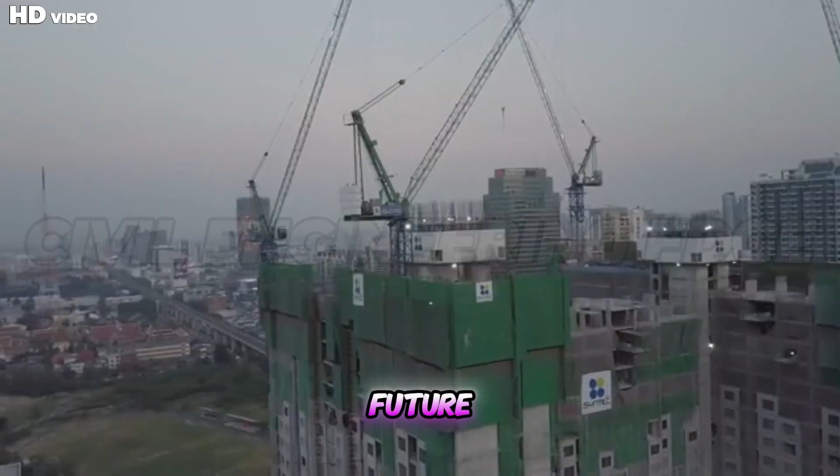Imagine a future where skyscrapers design themselves, where robots lay foundations, and where construction sites operate like intelligent ecosystems, learning, adapting, and building with flawless precision. That future isn't science fiction, it's happening right now.

Artificial intelligence is revolutionizing the world of civil engineering, transforming how we design, plan, and build. From autonomous machines to predictive modeling, AI is creating a smarter, safer, and more sustainable built environment.

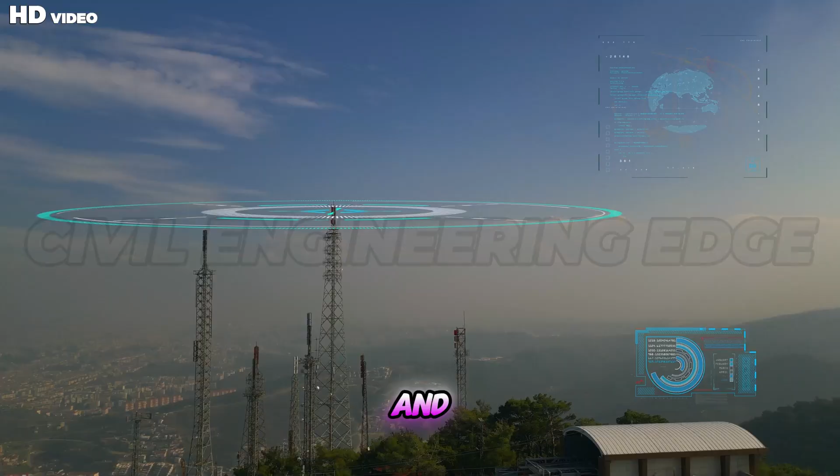What if I told you the buildings of tomorrow aren't designed by architects alone, but by algorithms that think, learn, and evolve? Imagine a world where skyscrapers optimize their own shape for wind resistance, where bridges can sense their own stress levels and request maintenance before a single crack appears. This isn't a scene from science fiction, it's happening right now.

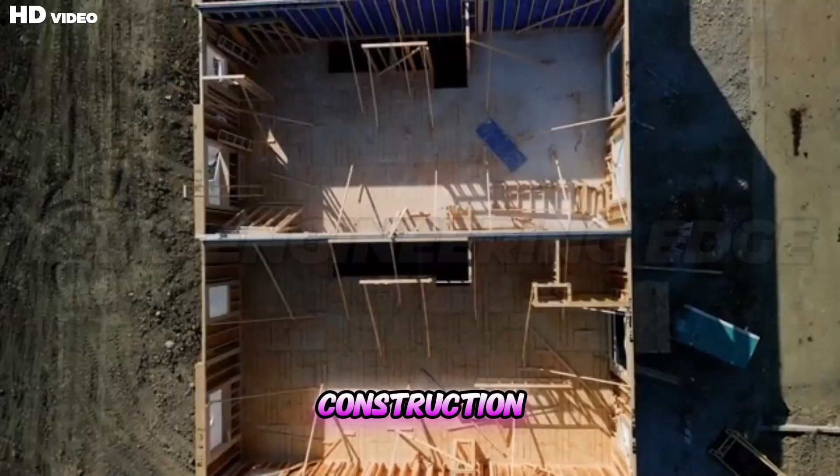Across the world, artificial intelligence has quietly entered construction sites, design studios, and project offices, transforming the way we imagine, plan, and build. From Tokyo's automated prefabrication plants to Dubai's 3D printed buildings, AI is not just assisting engineers, it's redefining engineering itself. The concept of construction has always relied on precision, coordination, and human expertise.

But today, the complexity of modern infrastructure, smart cities, mega projects, and climate-resilient structures has exceeded what human teams can analyze alone. AI steps in as an intelligent collaborator capable of scanning millions of data points, identifying the most efficient material usage, and predicting construction outcomes with astonishing accuracy.

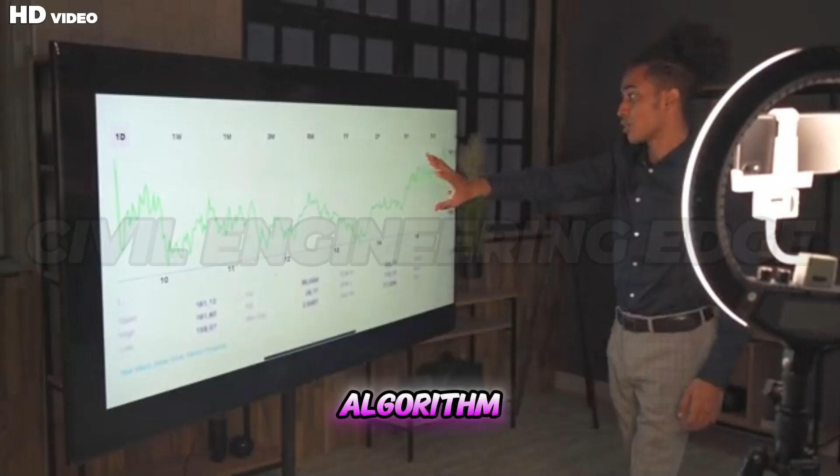Picture this. On a next-generation job site, robotic arms assemble steel components guided by AI vision systems. Drones continuously map progress, and a central algorithm monitors cost, safety, and schedule in real time. Every deviation, every inefficiency, every unsafe movement is flagged instantly. The site runs like a symphony, not by command, but by collaboration between human ingenuity and digital intelligence.

This quiet yet powerful transformation marks the silent revolution in civil engineering. Unlike revolutions of the past that shouted through machines and smoke, this one hums through sensors, models, and code. It's the evolution of creation itself, where technology doesn't just serve construction, it becomes part of it.

As we begin this exploration, remember, the skyline you'll see in the next decade isn't just human achievement. It is the outcome of minds, both biological and artificial, working together to build tomorrow's world.

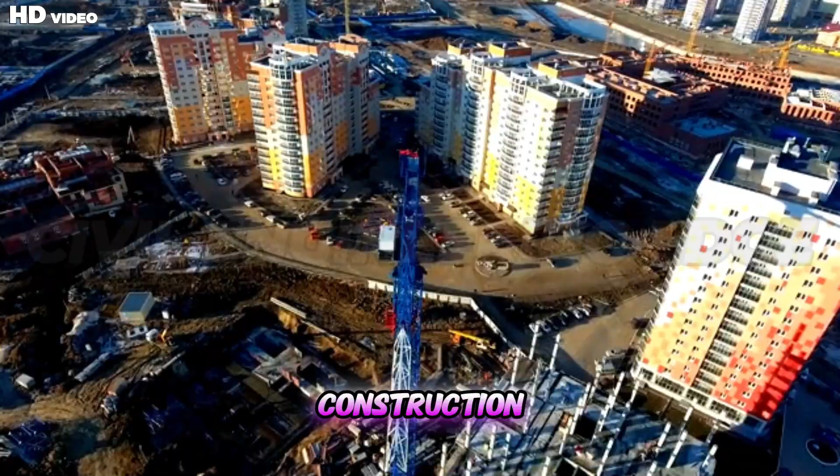To appreciate how AI is reshaping construction, we must first understand the challenges that have haunted the industry for generations. The modern construction sector is one of the world's largest, contributing nearly 13% of global GDP. Yet, it is also one of the least digitized. Projects routinely suffer from cost overruns, schedule delays, and rework. Studies reveal that on average, large projects take 20% longer to complete and cost 80% more than planned.

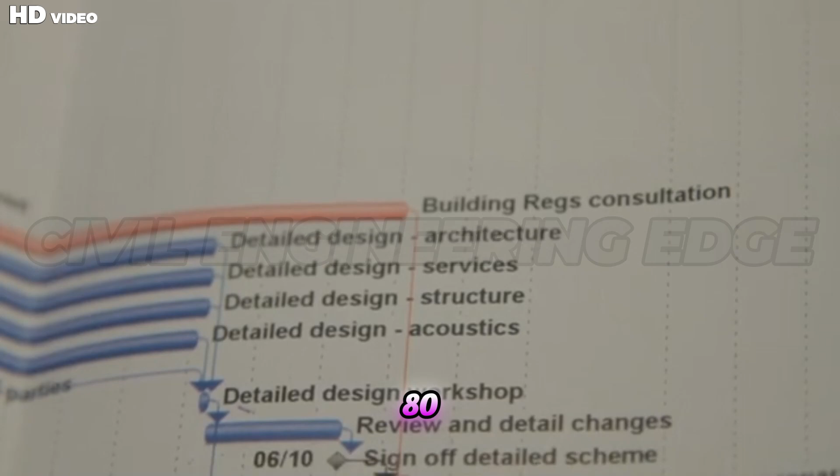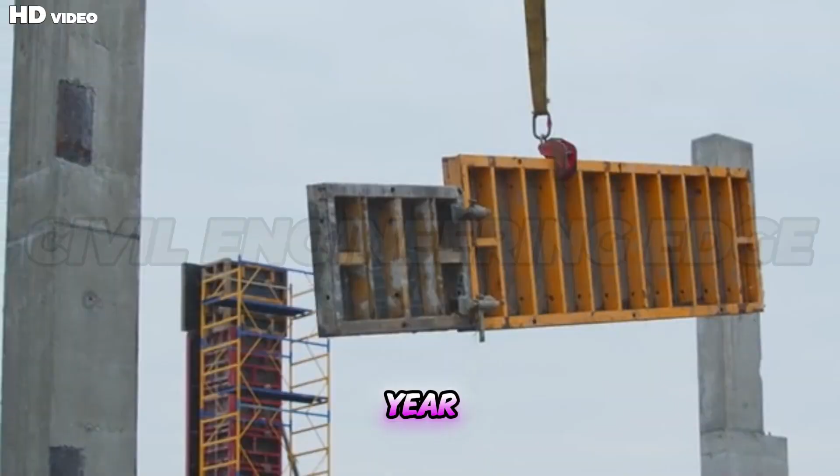Why? Because construction involves countless variables: weather changes, design alterations, material availability, and human coordination across hundreds of workers and suppliers. Even small errors early in planning can cascade into massive losses later. One miscalculated beam, one late delivery, or a misread design update can stall an entire project. These inefficiencies drain billions from global economies every year, and then there's the human cost.

Construction remains one of the most hazardous industries, responsible for nearly 1 in 5 workplace fatalities worldwide. Despite technological tools and safety regulations, real-time awareness and predictive risk control have been limited until now. Adding to that are labor shortages and the demand for faster urbanization. Cities are growing, infrastructure is aging, and sustainability standards are rising. Yet, the traditional methods of project execution cannot keep pace with these pressures.

At the same time, data fragmentation plagues the industry. Information is scattered across drawings, spreadsheets, emails, and software platforms. Most of this valuable data remains untapped. It's here that artificial intelligence finds its greatest purpose. AI can synthesize massive datasets, learn from previous projects, and identify inefficiencies invisible to the human eye. It can transform guesswork into precision, risk into predictability, and delay into optimization.

In short, the construction world is ripe for disruption. And AI is stepping in not as a futuristic luxury, but as a necessity, the key to solving the age-old problems of time, cost, and safety that have limited progress for decades.

Thesis statement: AI, transforming construction forever.

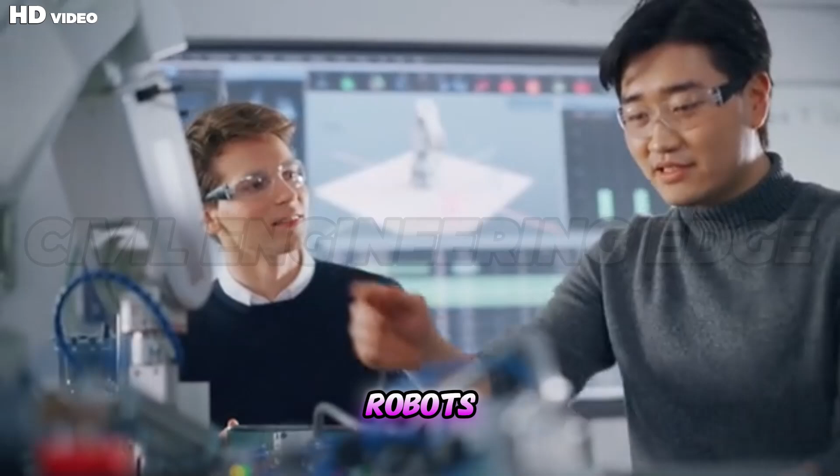Visual montage: engineers using AR glasses, robots tying rebar, dashboards glowing with live analytics, 3D printed walls rising layer by layer. The score turns uplifting, symbolizing innovation and renewal.

Artificial intelligence is not a minor upgrade to construction, it's a paradigm shift. Unlike past innovations that focused on stronger materials or faster machinery, AI changes the intelligence behind every decision. It's teaching the industry to think smarter, predict better, and build cleaner.

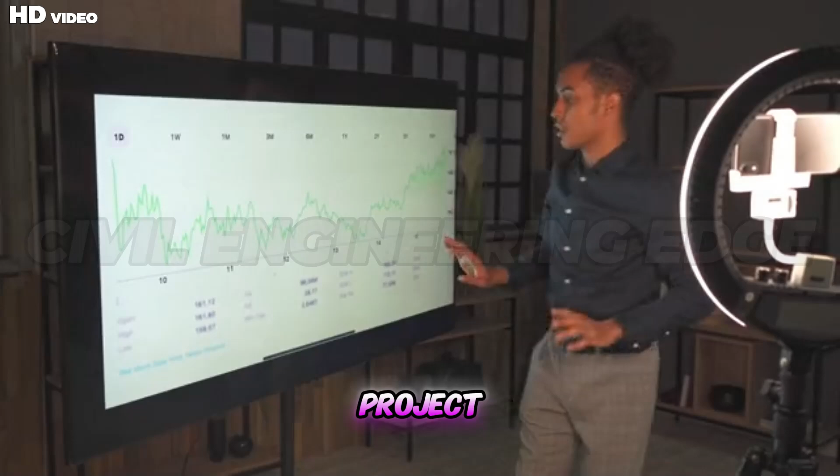In project management, AI now analyzes historical data and real-time conditions to forecast which activities risk falling behind schedule. Machine learning models detect subtle trends, weather disruptions, workforce performance, or material shortages, long before they cause trouble. Managers receive alerts, enabling proactive decisions that save both time and money.

In safety management, AI-powered cameras and sensors continuously scan the site, identifying unsafe postures, missing helmets, or hazardous proximity to machinery. These systems have already reduced accident rates on experimental smart sites by over 30%. In material logistics, algorithms track deliveries, calculate demand fluctuations, and prevent waste by suggesting optimal ordering sequences. The environmental footprint shrinks, while sustainability goals strengthen.

And when it comes to design, AI isn't just following rules, it's creating new ones. Through generative algorithms, engineers can input goals like maximize sunlight exposure or reduce steel weight, and the system produces countless optimized versions of a structure, each balancing performance and economy.

This synergy marks the fourth industrial revolution in construction, where human creativity fuses with digital intelligence. The result is a smarter, safer, and more sustainable industry capable of meeting global infrastructure needs with precision never before imagined. AI doesn't replace civil engineers, it amplifies them. It frees professionals from repetitive calculations, allowing them to focus on creativity, ethics, and innovation.

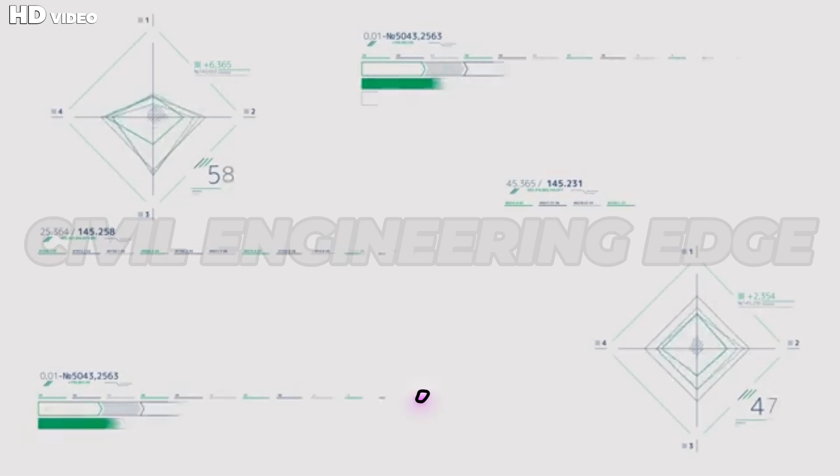The engineer of tomorrow will not only build with concrete and steel, but also with data and algorithms. The revolution is underway, reshaping the very foundations of how humanity constructs its future, and this is only the beginning. In the next chapter, we dive deeper into how AI transforms the most crucial stage of all, design and planning, taking us far beyond traditional blueprints into the realm of intelligent creation.

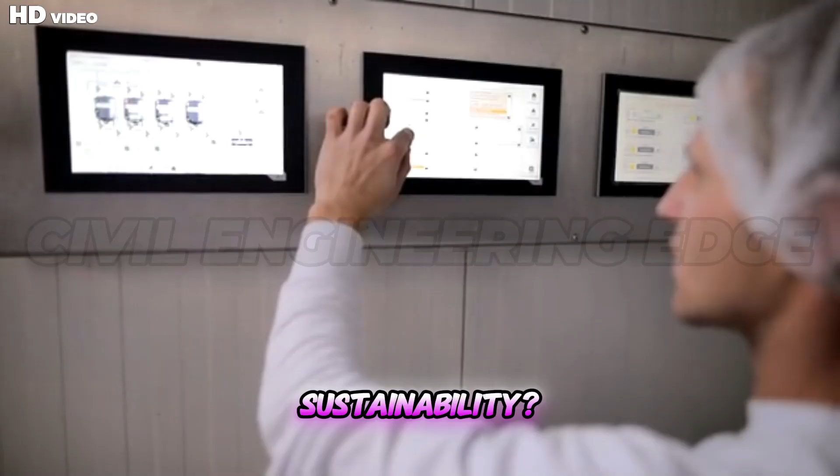In traditional design, engineers sketch, simulate, and iterate, a process often limited by time and imagination. But what if a computer could explore every possible solution, guided by physics, efficiency, and sustainability? That's the magic of generative design, one of AI's most astonishing tools in modern construction.

Generative design begins when engineers define a set of parameters: site dimensions, loads, materials, budget, or sustainability goals. Instead of producing one layout, the AI engine generates thousands of alternatives, each tested against structural performance, safety, and cost effectiveness. The system doesn't guess. It learns, refines, and evolves, discovering design solutions beyond human intuition.

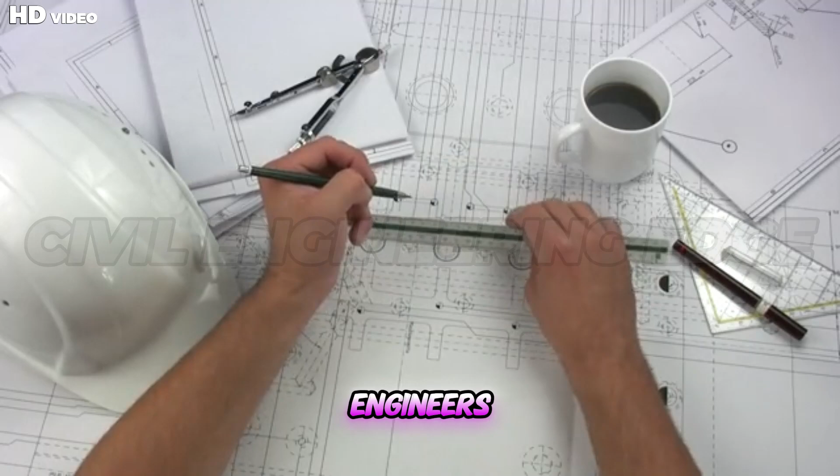Imagine designing a high-rise tower in a wind-prone city. Traditionally, engineers might analyze 5 or 6 structural frames. With AI-driven generative design, the software explores thousands, each accounting for wind velocity, seismic loads, energy flow, and even sunlight exposure. Within minutes, the algorithm identifies the geometry that balances stability, comfort, and material economy.

In practice, companies like Autodesk, Arup, and Airbus have used generative design to create incredible forms. Autodesk's Toronto office, for example, was designed through AI optimization. The program generated 10,000 potential layouts, balancing daylight, employee preference, and acoustic comfort, selecting the best configuration for human productivity.

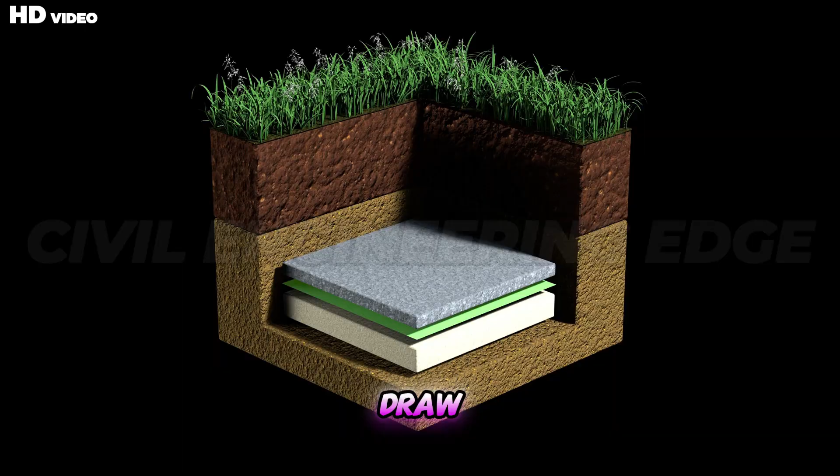Similarly, in bridge design, AI algorithms mimic natural patterns like bone or coral growth to minimize weight while maintaining strength, a principle now used in 3D printed trusses and modular bridge decks. For civil engineers, this is revolutionary. The AI doesn't just draw, it thinks structurally. It identifies where loads can redistribute, where materials can be reduced, and how form can serve function with maximum efficiency.

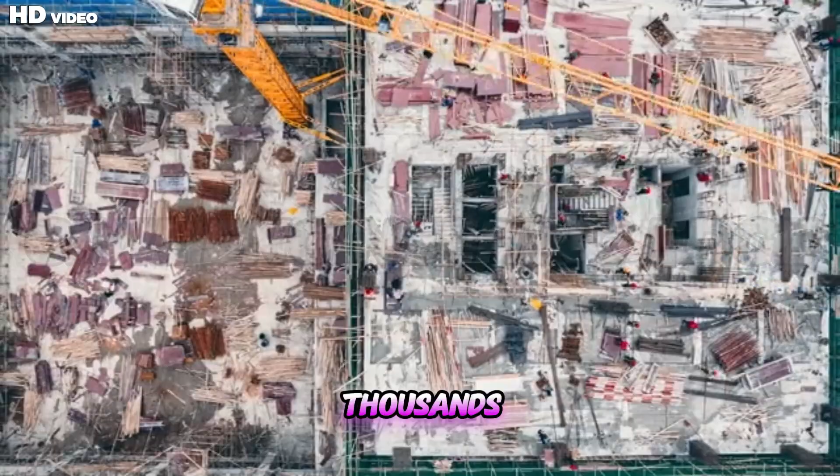Engineers can now focus on judgment and innovation while AI handles the computational complexity. Generative design represents the future where data replaces guesswork and algorithms enhance creativity. Structures become more sustainable, lighter, and resilient. AI's ability to simulate and optimize thousands of iterations not only saves time, but also minimizes waste and cost.

In essence, AI has become the co-designer of the modern world, crafting solutions that were once impossible to conceive. It's not the end of human creativity, it's the expansion of it. The blueprint is no longer static. It's alive, adaptive, and intelligent.

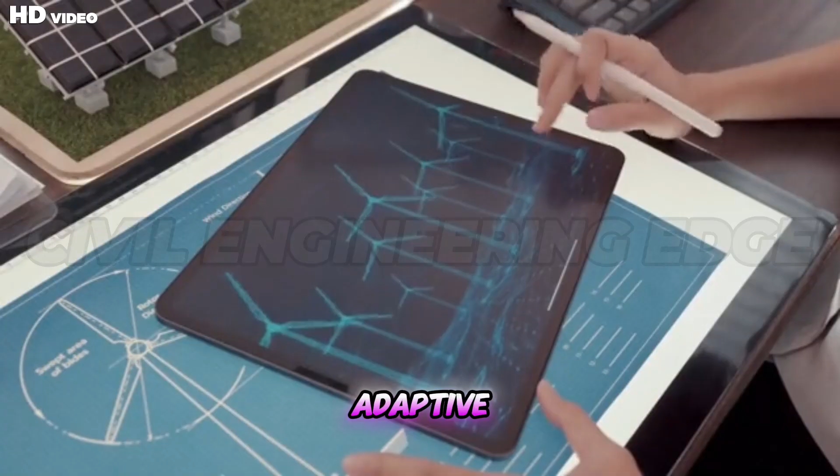Predictive modeling: forecasting time, cost, and risk. Visual: dashboards filled with project analytics, timelines, and 3D models updating in real time. AI overlays highlight potential bottlenecks before they occur.

Background: confident, analytical tone. In construction, uncertainty has always been the greatest enemy: delays, cost overruns, material shortages, or unforeseen risks. But what if engineers could see the future of their projects before even laying the foundation? That's the power of AI-driven predictive modeling.

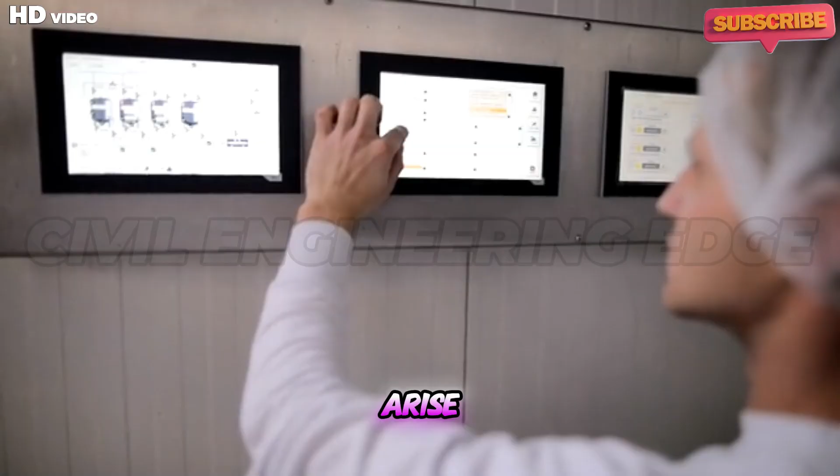Predictive modeling uses artificial intelligence and machine learning to analyze historical data, sensor inputs, and environmental conditions to forecast project outcomes with incredible accuracy. Instead of reacting to problems, project managers can now prevent them before they even arise. Every construction site generates enormous data: labor productivity, weather patterns, delivery schedules, equipment health, and material flow.

AI sifts through all of it, recognizing patterns invisible to human planners. The system then predicts where potential risks may emerge, whether it's a schedule delay due to rain, a cost spike caused by supply issues, or a safety hazard from equipment fatigue.

For example, AI-based scheduling tools like ALICE Technologies and nPlan have revolutionized how engineers plan megaprojects. These systems learn from thousands of past projects, analyzing what caused delays or cost escalations. When applied to a new project, AI forecasts likely risks, suggests the most efficient sequence of activities, and even simulates multiple construction strategies to find the one that minimizes downtime and maximizes productivity.

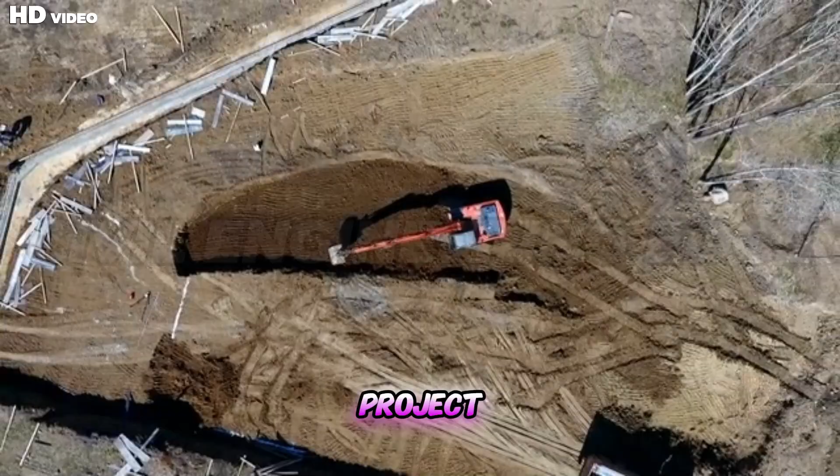Consider a metro tunnel excavation project. The AI can analyze soil composition, machinery performance, and previous tunneling records to predict where collapse risks or slowdowns might occur. Managers can then reassign resources, adjust work hours, or strengthen supports before problems appear.

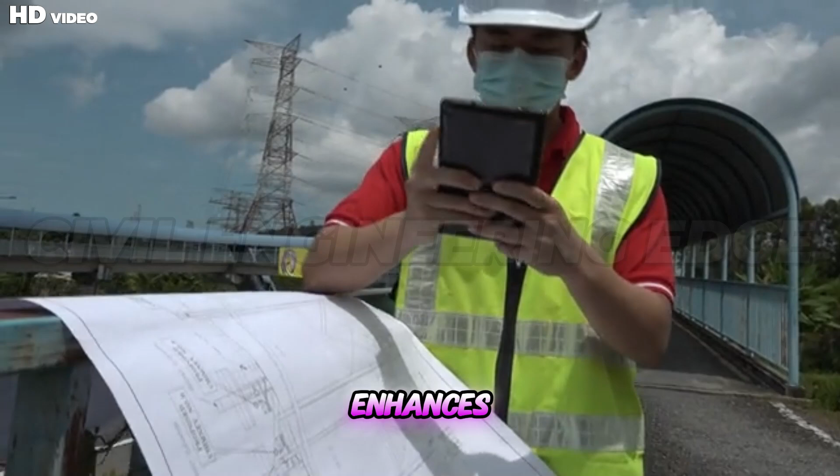The impact on budgeting is equally powerful. AI-driven cost models continuously update based on market trends, material prices, and labor rates, providing real-time financial foresight. This means project managers no longer rely solely on static estimates. They work with dynamic forecasts that evolve with the project. Predictive modeling also enhances safety. AI can evaluate site footage and worker movement to anticipate accident-prone areas, ensuring proactive safety measures.

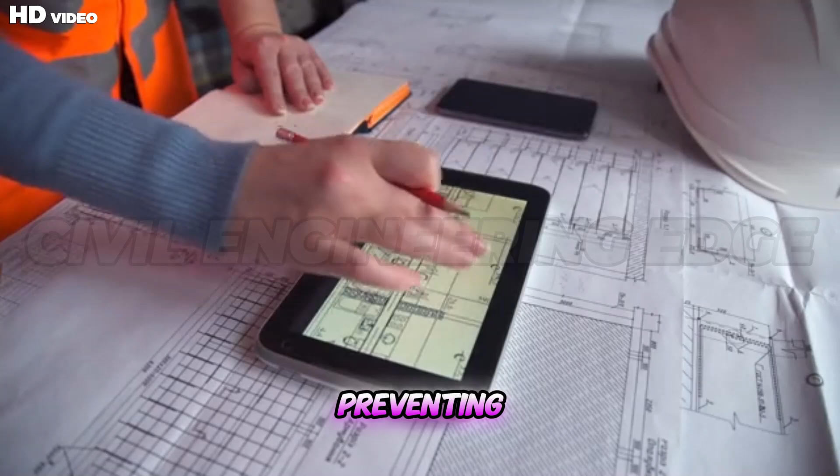Ultimately, predictive modeling transforms uncertainty into precision. It gives engineers a digital sixth sense, an analytical intuition that sees risks ahead, controls costs, and ensures timely delivery. In the age of AI, construction management is no longer about reacting. It's about predicting, planning, and preventing. The result: safer projects, leaner budgets, and timelines that finally stay true to their promise.

BIM integration, supercharging collaboration and clash detection. Visual: immersive digital environment. Architects, engineers, and contractors wearing AR headsets interact with a shared 3D model floating in midair. Lines glow as AI detects and resolves design conflicts automatically.

Few innovations have transformed construction collaboration like building information modeling, BIM. But when combined with artificial intelligence, BIM evolves from a visualization tool into an intelligent ecosystem, one that thinks, predicts, and coordinates every layer of a project in real time. Traditional BIM allows architects, engineers, and contractors to work on a shared 3D model. However, human coordination still leaves room for design clashes, a duct running through a beam, or misaligned columns between structural and mechanical drawings. With AI-powered BIM integration, these conflicts are detected automatically, even before construction begins.

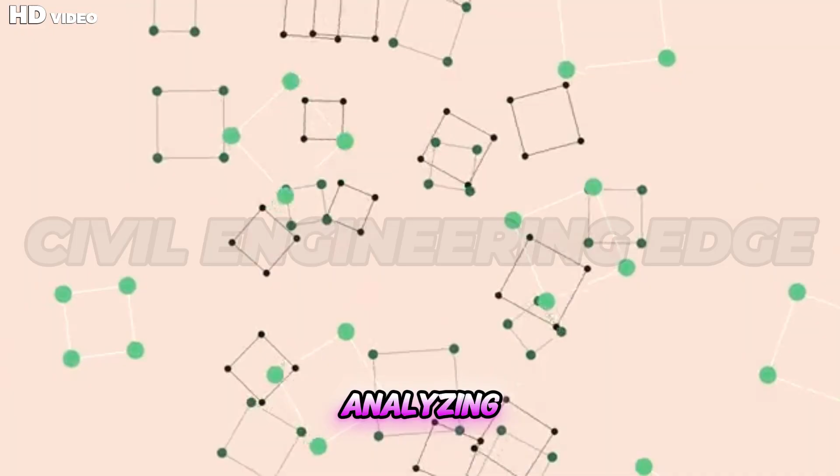Here's how it works. AI algorithms continuously scan the BIM database, analyzing geometry, materials, and connections. When the system identifies a potential clash, say an HVAC line intersecting a reinforcement zone, it alerts the design team instantly. Not only that, AI can also suggest corrections, recommending the optimal routing path or dimension adjustments based on learned patterns from thousands of previous models.

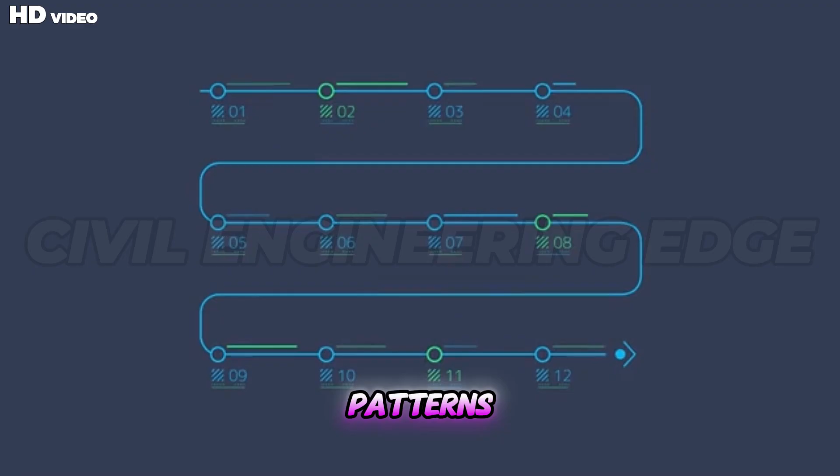The power of AI BIM integration doesn't stop there. Real-time project data from drones, sensors, or IoT devices feeds back into the BIM model, creating what's known as a digital twin. This twin mirrors the physical site, tracking progress, material status, and performance metrics. Engineers and managers can virtually walk through the live model, spotting delays or design mismatches immediately.

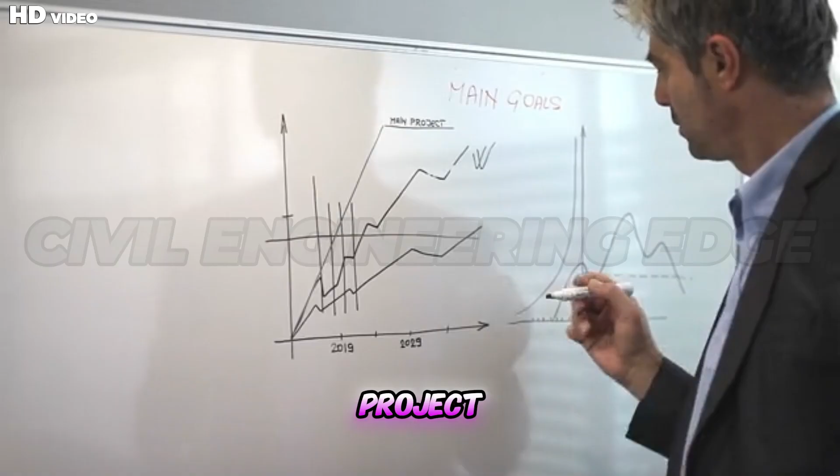Companies like Trimble, Autodesk, and Bentley Systems are pioneering AI-assisted BIM platforms where machine learning predicts scheduling conflicts, material shortages, or structural stress concentrations. The system learns from every project, meaning each new build becomes smarter than the last. AI also enhances collaboration across disciplines. Structural, electrical, and mechanical teams no longer work in isolation. Instead, AI harmonizes inputs from all fields, ensuring consistency and accuracy throughout the life cycle, from concept to maintenance.

Imagine viewing an entire smart city model where every bridge, tunnel, and high-rise updates in real time: energy use, crowd flow, temperature, and structural health visible through an AI dashboard. That's not a dream. It's the direction in which construction technology is rapidly evolving. In essence, AI transforms BIM from a static 3D model into a living, learning infrastructure system. It doesn't just help us see buildings better, it helps us build them smarter, faster, and safer than ever before.

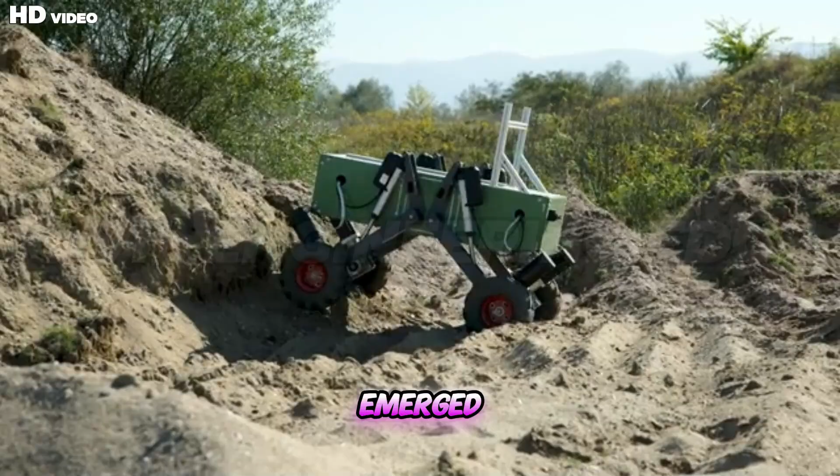Robotics and automation, the smart workforce: autonomous construction equipment. In the modern era of construction, a new generation of workers has emerged, tireless, precise, and immune to fatigue. These are the autonomous construction machines, intelligent excavators, bulldozers, and dump trucks guided not by human hands, but by algorithms and sensors. They represent the dawn of a truly smart workforce.

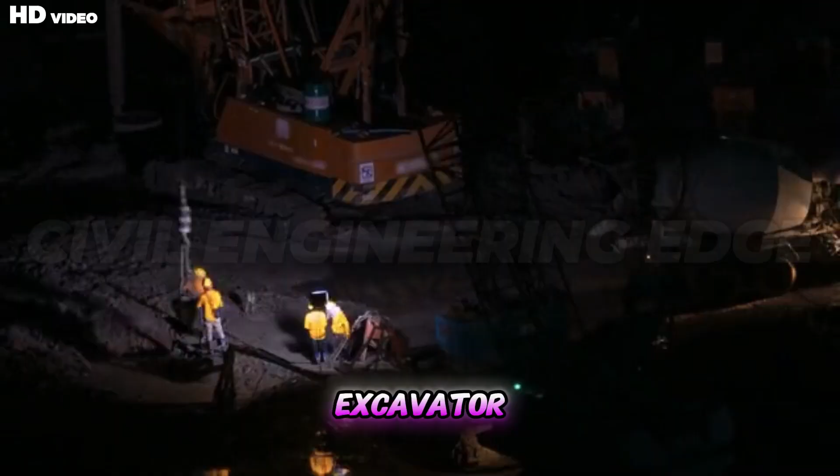At the heart of this revolution lies artificial intelligence, integrating machine learning, LiDAR, GPS, and computer vision systems into heavy equipment. Imagine a massive excavator that can dig foundations all night long, guided by digital blueprints and real-time terrain mapping. AI enables these machines to read site conditions, detect underground utilities, and adjust excavation angles automatically. The result: flawless precision, minimal waste, and zero human risk.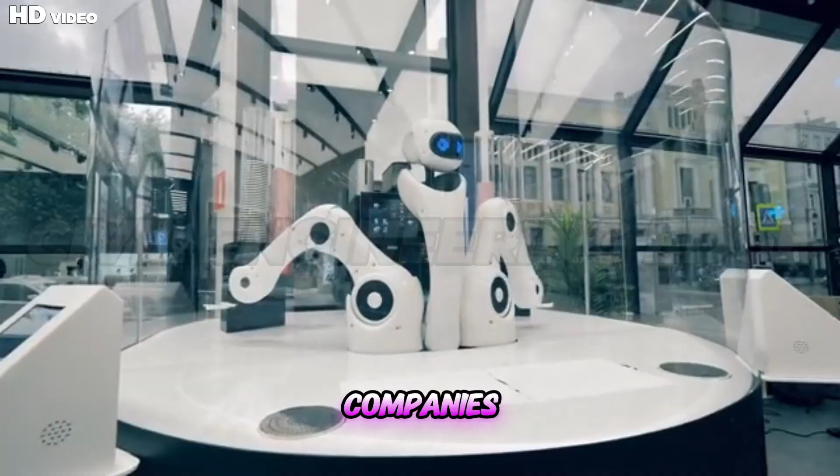Companies like Built Robotics and Caterpillar are pioneering this frontier. Built Robotics has transformed standard excavators into fully autonomous digging systems capable of trenching hundreds of meters per day without human intervention. These machines operate using 360-degree cameras and laser sensors, communicating continuously with AI control systems to ensure accuracy.

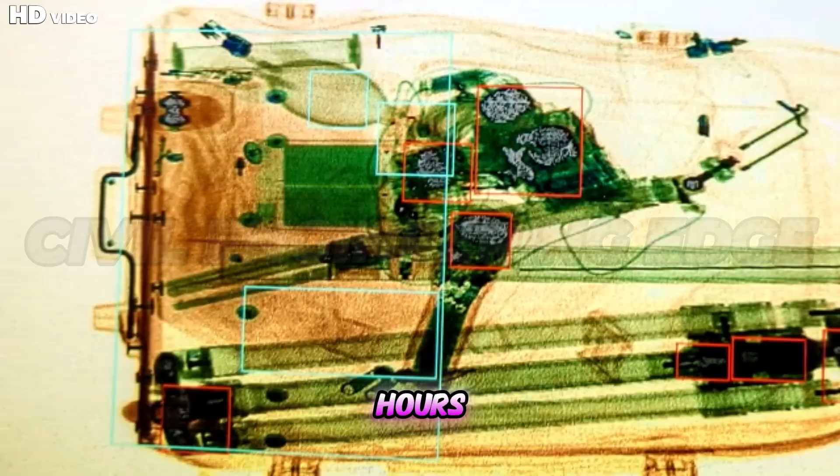Meanwhile, autonomous bulldozers at large infrastructure sites perform grading and leveling tasks with sub-centimeter precision. Tasks that once took days are now completed in hours. Beyond productivity, safety is the biggest gain. AI-driven vehicles can navigate hazardous or unstable terrains where human operators would be at risk. In mining zones, tunnels, or high-altitude construction sites, autonomy drastically reduces accidents and human exposure to danger.

Furthermore, with predictive analytics, these machines can self-diagnose maintenance needs before breakdowns occur, eliminating costly downtime. The environmental impact is equally impressive. By optimizing movements, AI minimizes idle times and fuel consumption. Data-driven route planning ensures efficient logistics, reducing carbon footprints across large projects.

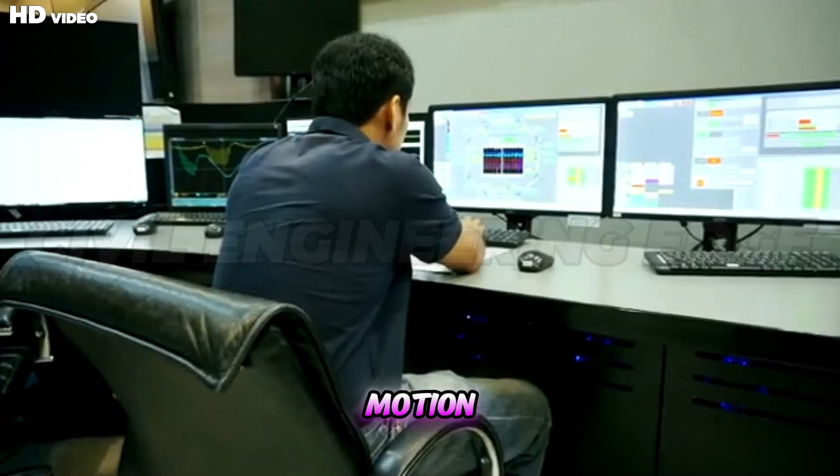We are witnessing a new paradigm: construction sites that operate 24/7, orchestrated by networks of intelligent machines. Engineers no longer manually control every motion. Instead, they design workflows, set parameters, and supervise fleets through digital dashboards. The synergy between human expertise and AI automation doesn't replace workers, it redefines their role. Operators evolve into system managers, focusing on strategy, data analysis, and site optimization rather than manual control.

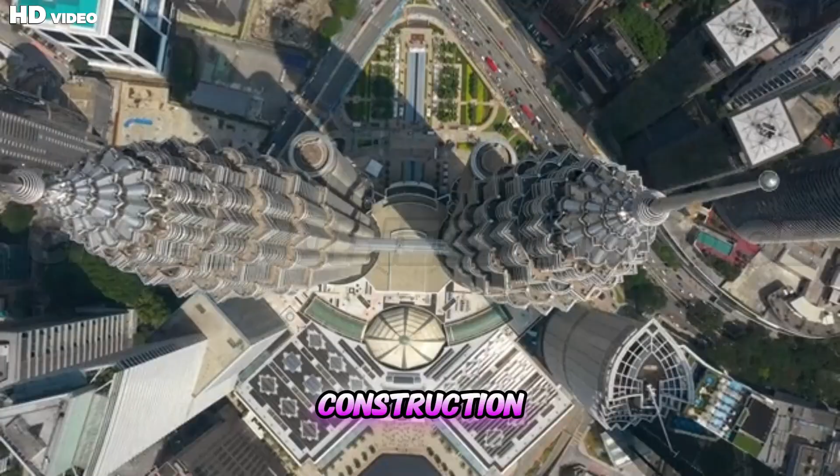The result: faster projects, safer environments, and smarter decisions. Autonomous equipment marks the beginning of a construction ecosystem where precision and intelligence build the foundations of tomorrow's cities, efficiently, sustainably, and safely. 3D robotic bricklayers and welders, the precision builders.

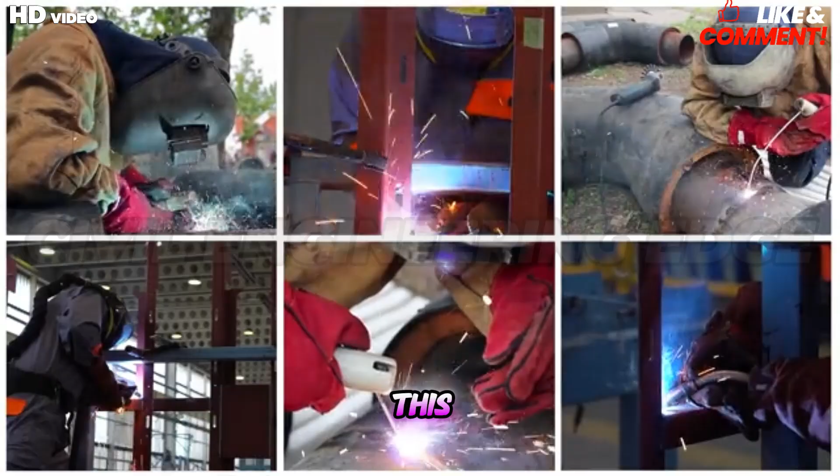Imagine a construction site where walls rise overnight, each brick placed with millimeter perfection. This isn't science fiction. It's the reality being shaped by robotic bricklayers and welders powered by artificial intelligence. These machines are transforming repetitive, labor-intensive processes into fully automated, high-precision operations. Traditional masonry and welding require years of craftsmanship.

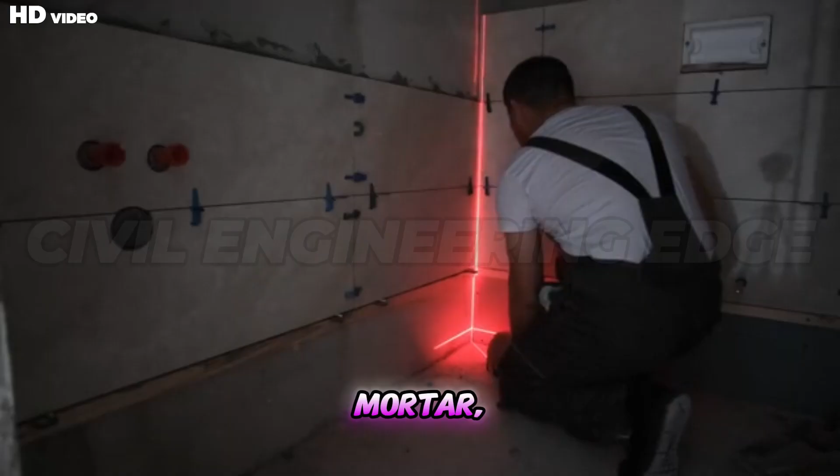But now, AI-driven robots such as the SAM-100 semi-automated mason and Hadrian X can lay bricks faster, safer, and with astonishing consistency. SAM-100, for example, works alongside human masons, applying mortar, positioning bricks, and aligning each one using laser-guided sensors. It can lay over 3,000 bricks per day, nearly 6 times faster than a human worker.

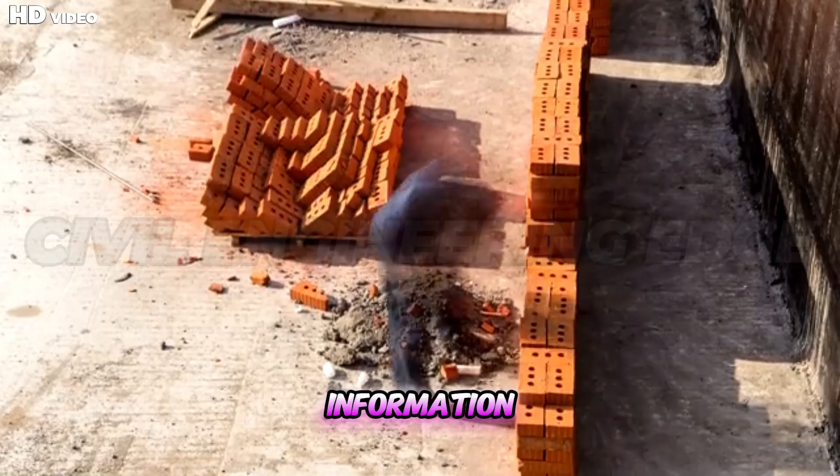Similarly, Hadrian X, developed by Australia's Fastbrick Robotics, uses a 30-meter robotic arm capable of constructing an entire house structure from a 3D digital model. The robot reads BIM, building information modeling, data, calculates each brick's exact position, and executes with minimal waste. No fatigue, no errors, just algorithmic precision.

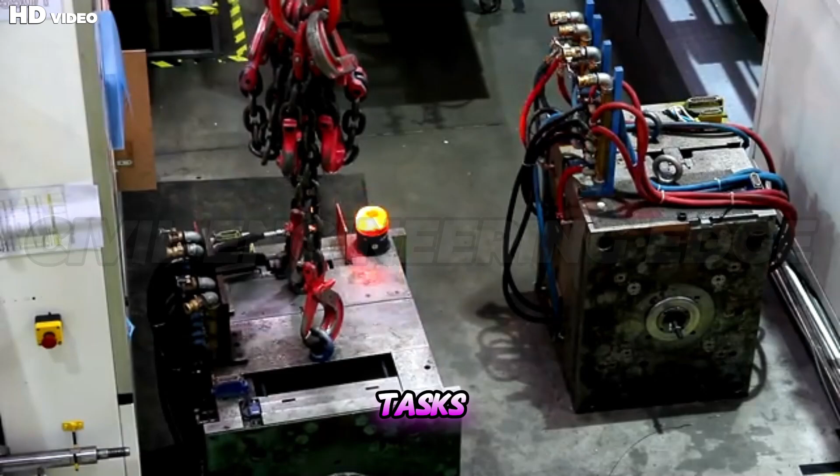AI plays a critical role in this process. Computer vision systems guide robotic arms, while deep learning algorithms continuously optimize speed, angle, and force based on feedback from sensors. For welding tasks, AI-powered robots perform seam detection, path planning, and quality inspection, guaranteeing perfect joints every time. Systems like those by ABB and Lincoln Electric are revolutionizing industrial-scale welding, especially in bridge fabrication and steel frameworks.

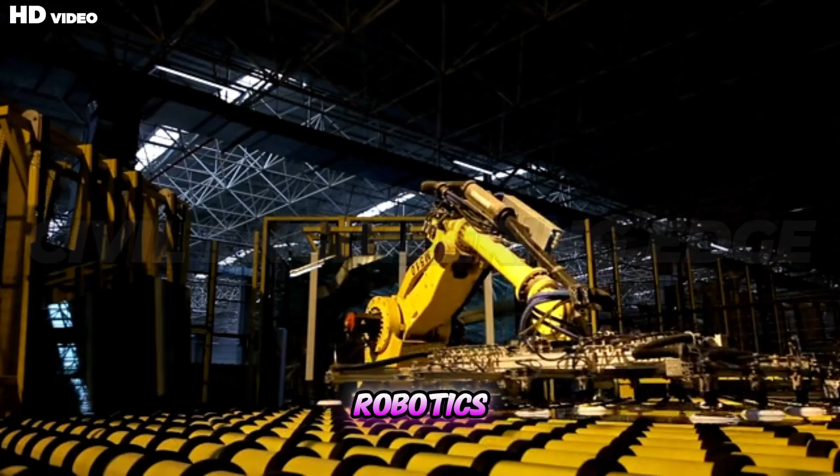Beyond productivity, robotics addresses one of the biggest challenges in the industry: labor shortages. Skilled welders and masons are becoming increasingly scarce. Robotic automation bridges this gap, ensuring projects progress without delay. These robots don't replace humans entirely. Instead, they allow skilled professionals to focus on design, supervision, and quality assurance.

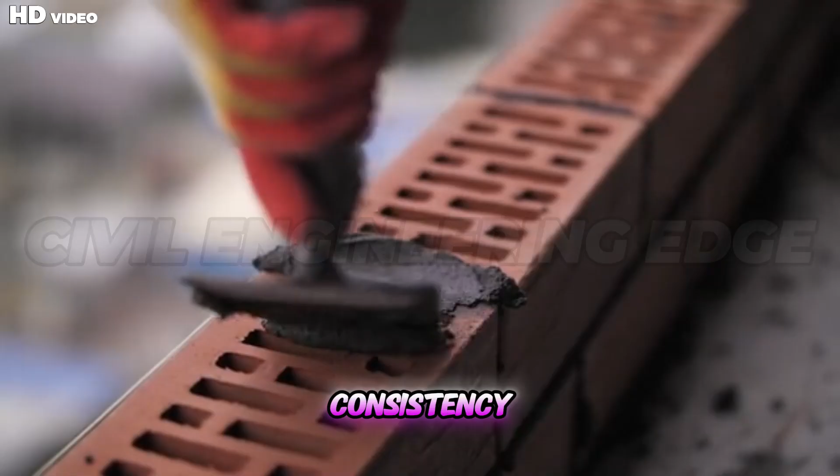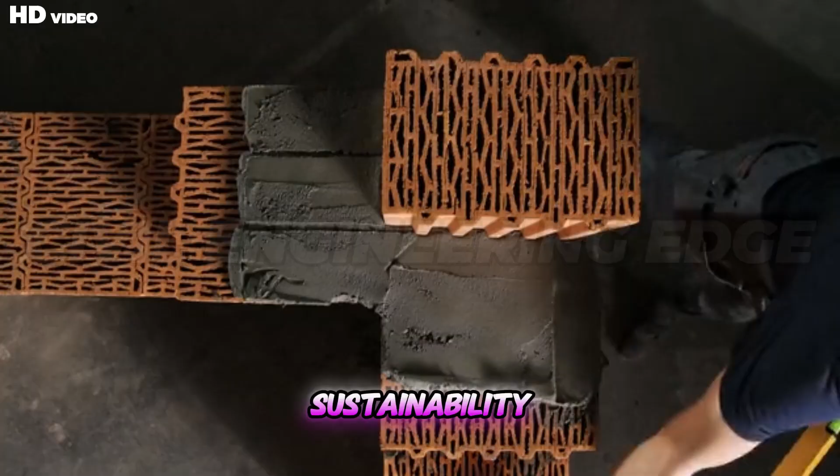The consistency and accuracy offered by robotic systems lead to structural reliability and reduced rework. AI algorithms detect imperfections instantly, ensuring each weld or layer meets the highest standards. Moreover, automation cuts material waste, saving costs and promoting sustainability. The collaboration between humans and robots defines the construction sites of the future, where digital plans become physical structures with breathtaking accuracy. AI ensures that each repetitive motion contributes to an error-free, efficient build.

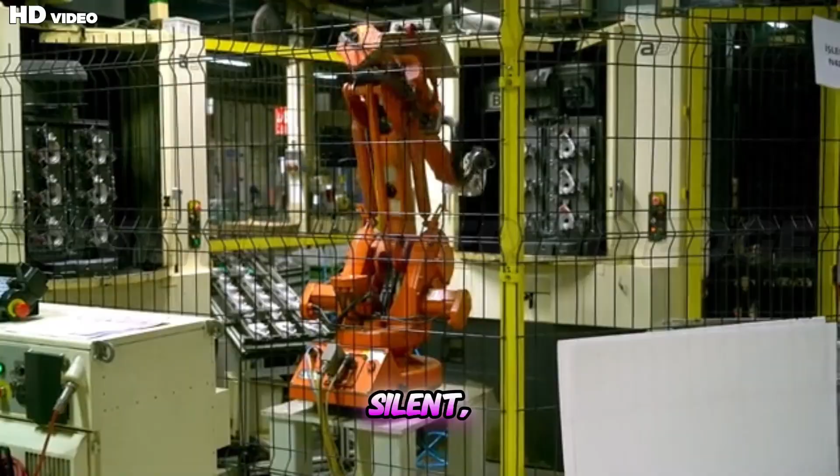In this new era, robots aren't just tools, they're teammates, silent, precise, and endlessly reliable, building the world brick by brick, weld by weld, into a smarter and stronger future.

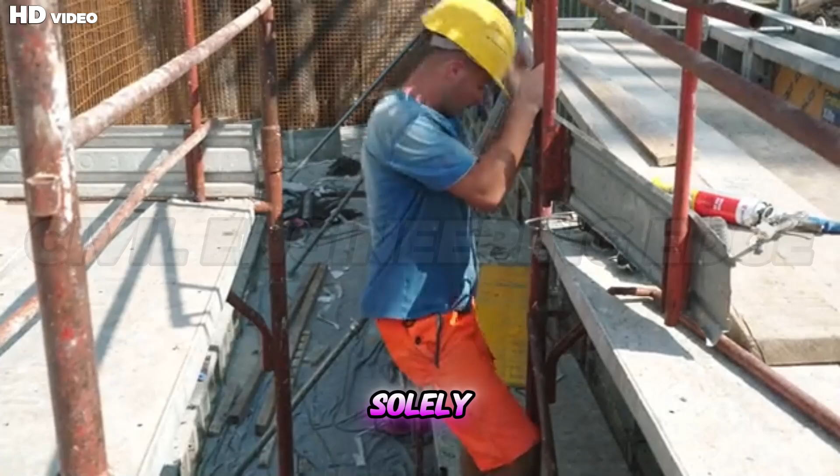Drone-based progress monitoring, eyes in the sky. High above the bustling construction sites of the modern world, fleets of AI-powered drones serve as vigilant overseers, scanning, mapping, and analyzing every inch of progress with unmatched accuracy. These airborne assistants have revolutionized the way civil engineers monitor, manage, and perfect construction projects. Gone are the days when engineers had to rely solely on manual inspections or incomplete progress reports.

Today, drones equipped with high-resolution cameras, LiDAR scanners, and AI analytics provide real-time insights into site performance. A single drone flight can capture thousands of images, stitching them into detailed 3D models and topographic maps that reveal even the slightest deviation from design.

AI is the brain behind this process. Using computer vision and machine learning, the system automatically detects inconsistencies between the planned model and the actual site condition. It identifies issues such as uneven grading, material shortages, safety hazards, or delays, long before they escalate into costly problems. This level of proactive quality control was once unimaginable.

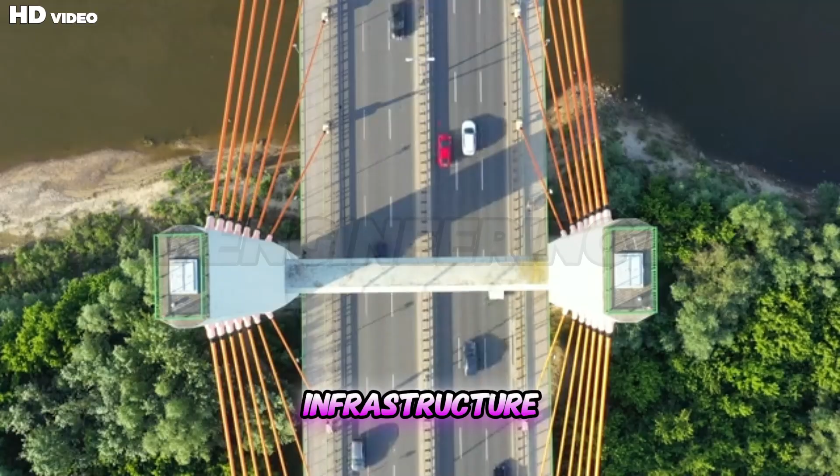For instance, companies like DJI Enterprise and DroneDeploy are leading the charge with drone AI integrations capable of mapping vast construction zones in minutes. The data collected is then processed using AI algorithms that measure work progress, verify quantities, and even assess equipment utilization. Project managers can view these updates on digital dashboards, ensuring transparency and accountability across teams. In large-scale infrastructure projects, drones also enhance safety.

They monitor hazardous zones, reducing the need for human entry into dangerous areas. AI-based object detection algorithms identify potential safety violations, such as missing helmets or exposed wiring, issuing automatic alerts in real time.

Beyond monitoring, drones serve as crucial tools for documentation and stakeholder communication. High-resolution aerial footage and progress videos allow clients and investors to visually track development, improving confidence and collaboration. The efficiency gains are tremendous. What once required hours of manual surveying and data entry can now be done autonomously in minutes, with AI ensuring every pixel is analyzed. The result: faster decision-making, improved accuracy, and optimized project timelines.

In the grand vision of AI-powered construction, drones represent the eyes in the sky, merging technology with oversight. They give engineers the power to see the invisible, to catch errors before they happen, to ensure perfection before completion. Through AI-driven drone monitoring, the construction industry is truly ascending, reaching new heights of efficiency, safety, and precision, quite literally building tomorrow's world from above.

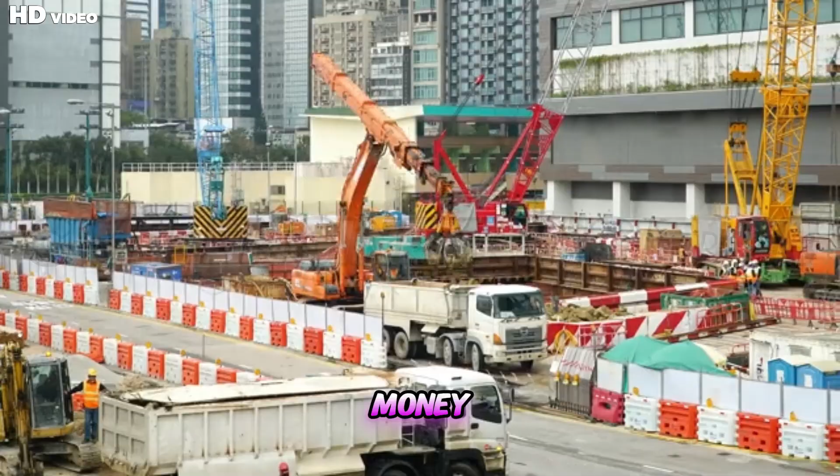Optimizing project management and supply chains. AI-powered scheduling: dynamic project timelines that think for themselves. In the fast-paced world of construction, time is money, and delays can turn million-dollar dreams into financial nightmares. But what if project schedules could think for themselves? What if timelines could adapt automatically to weather changes, equipment breakdowns, or supply delays? Welcome to the era of AI-powered scheduling, where artificial intelligence transforms rigid project plans into living, dynamic systems.

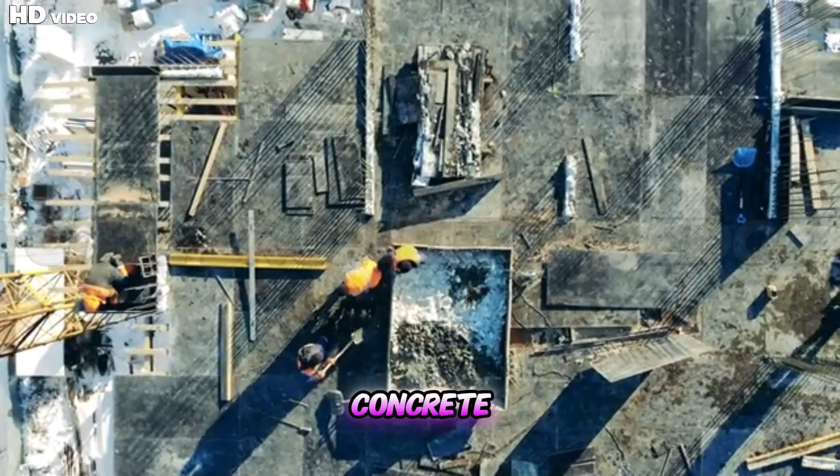Traditionally, project scheduling relied on static Gantt charts and human intuition. Engineers manually tracked dependencies, adjusted timelines, and tried to anticipate conflicts, often after they had already occurred. Today, AI revolutionizes this process by using real-time data integration and predictive analytics to continuously optimize schedules. Every decision, from when to pour concrete to when to deliver steel beams, is driven by data, not guesswork.

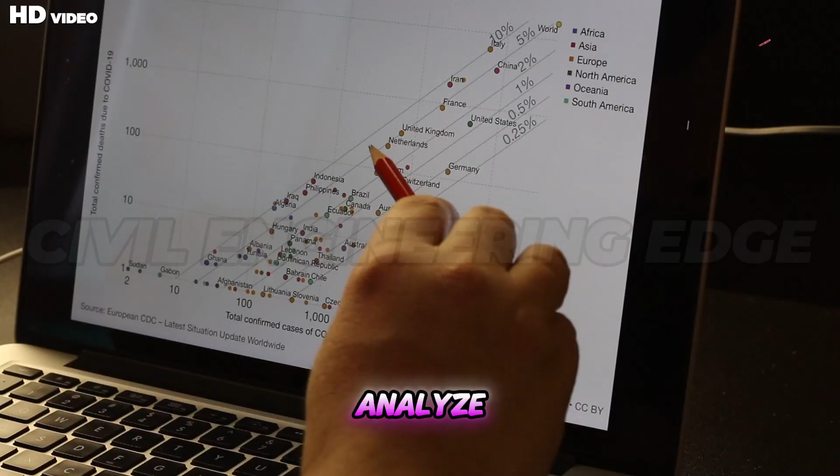AI scheduling platforms like Alice Technologies, Oracle Aconex, and Procore AI simulate thousands of potential project scenarios in minutes. They analyze resource availability, labor efficiency, equipment status, and even weather forecasts to generate the best possible project path. If a supplier delay occurs or unexpected rain halts foundation work, the AI automatically recalculates the schedule, ensuring the rest of the workflow stays optimized without human panic or paperwork.

This technology also enables resource allocation precision never before possible. AI identifies underutilized labor or idle equipment and reallocates them in real time. It highlights potential clashes in subcontractor activities and ensures that every worker, machine, and material operates in perfect harmony. In essence, the entire project becomes a self-regulating ecosystem.

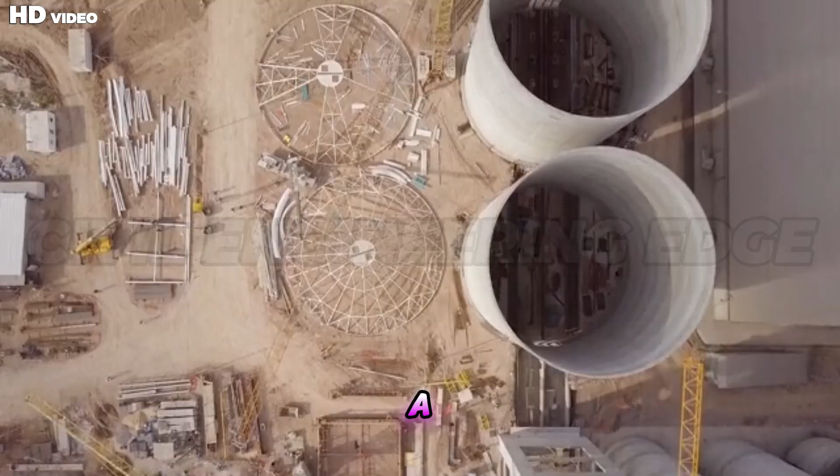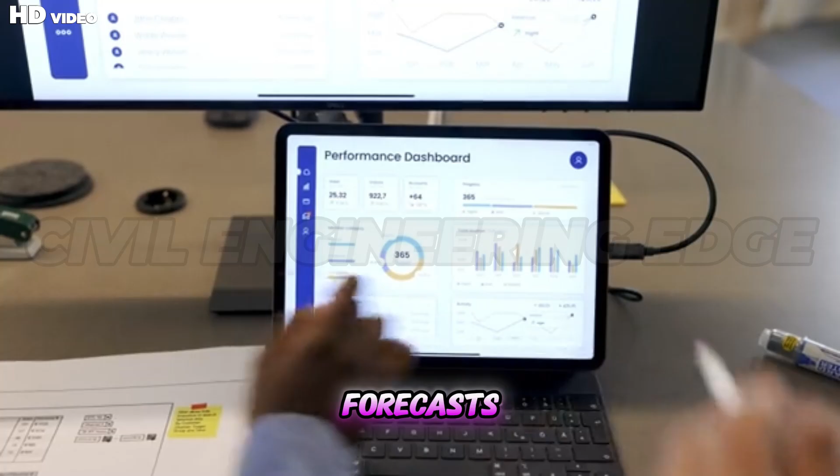For large infrastructure developments like highways, metros, or smart cities, AI scheduling offers another major advantage: data transparency. Engineers and stakeholders can access cloud-based dashboards showing live updates, performance metrics, and progress forecasts. This real-time visibility reduces disputes, enhances coordination, and accelerates decision-making. The impact on productivity is profound. Projects complete faster, with fewer delays and dramatically lower overhead costs.

The technology doesn't just track progress. It anticipates obstacles and proactively resolves them before they affect the critical path. In the AI-driven future, the project schedule isn't a static document pinned on a wall. It's a dynamic, thinking partner that learns, adapts, and evolves alongside the construction process. AI transforms project management from reactive firefighting into predictive orchestration, creating a world where construction flows with precision, not pressure.

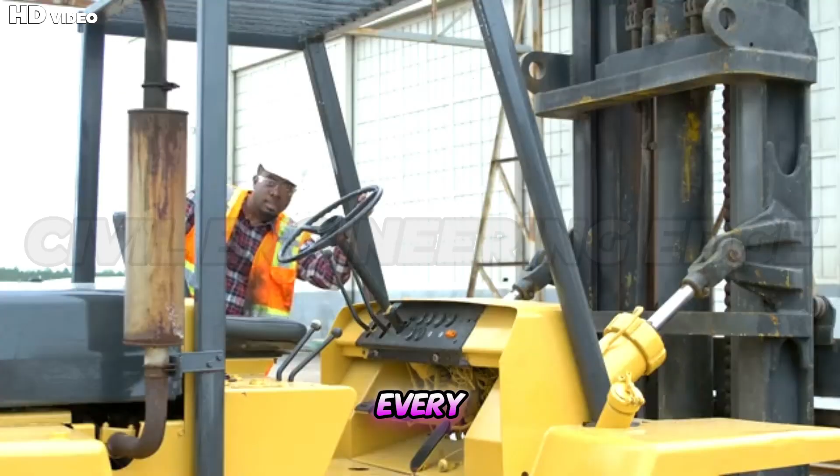Predictive maintenance: preventing downtime before it happens. Every minute a machine stops working on a construction site costs money, time, and momentum. Traditionally, maintenance has been reactive, fixing equipment after failure, but AI has flipped the script. With predictive maintenance, machines now warn us before they break down, transforming downtime into foresight and efficiency.

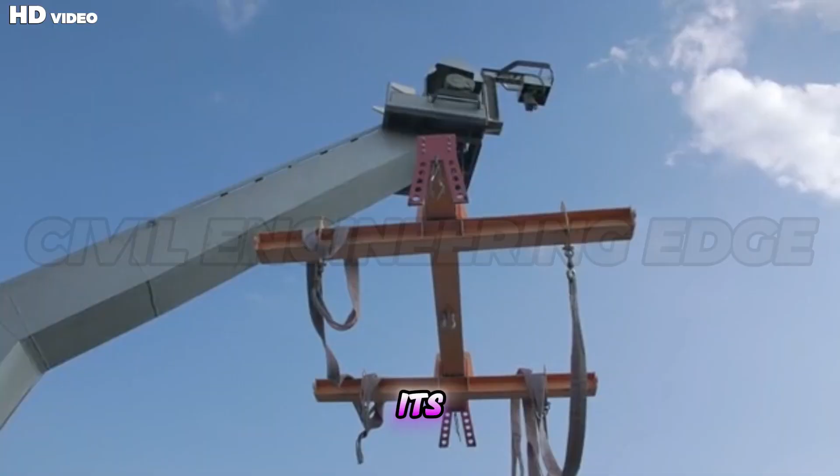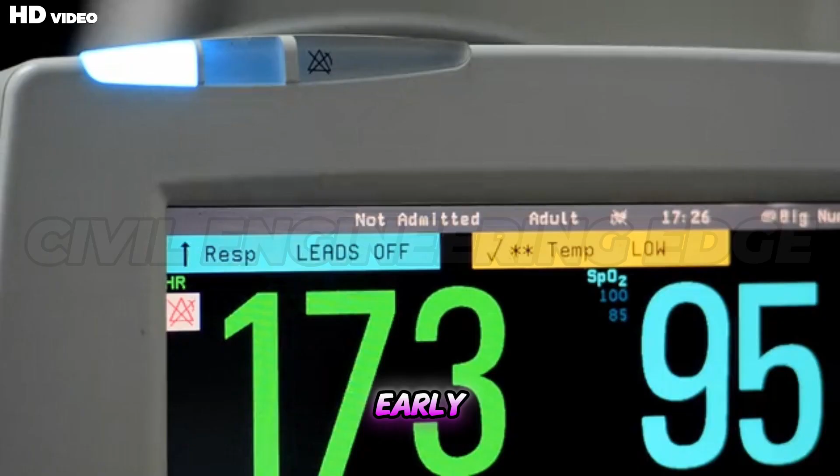At its core, predictive maintenance uses AI algorithms and IoT (Internet of Things) sensors embedded within construction equipment: excavators, cranes, concrete mixers, and trucks. These sensors constantly collect data on engine temperature, vibration, oil pressure, hydraulic flow, and more. AI then analyzes this data to detect subtle patterns invisible to the human eye, the early signs of mechanical wear or potential failure. Instead of waiting for a machine to malfunction, AI systems like Caterpillar's Cat Connect and Komatsu's Smart Construction alert managers days or even weeks before a breakdown.

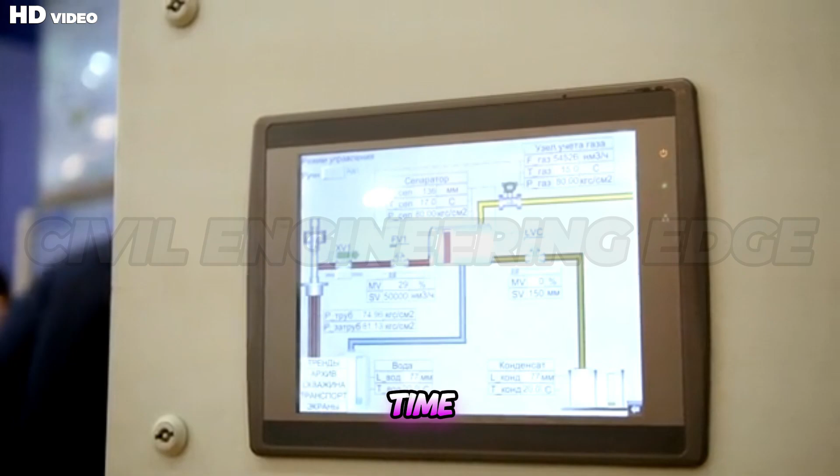For instance, if an excavator's hydraulic pump starts showing unusual vibration trends, the AI system predicts a future failure and schedules maintenance at the most convenient time, long before the issue becomes critical. This predictive insight leads to massive cost savings. Studies show that AI maintenance reduces equipment downtime by up to 50% and maintenance costs by nearly 30%. Moreover, it extends the lifespan of machinery by ensuring timely intervention and optimal performance.

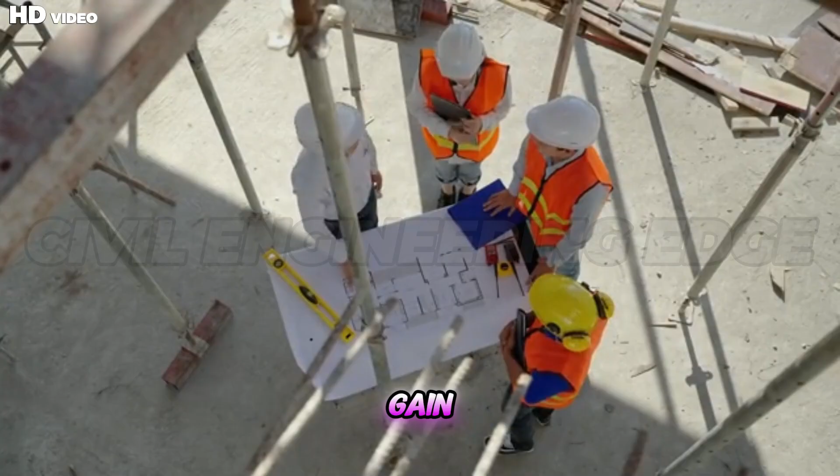Beyond cost, safety is another crucial gain. Equipment failures on site can lead to catastrophic accidents. AI ensures that malfunction risks are minimized, protecting both human lives and investments. Through automated alerts, engineers can instantly know which machines require attention and which can continue operating safely. The technology also enables data-driven fleet management.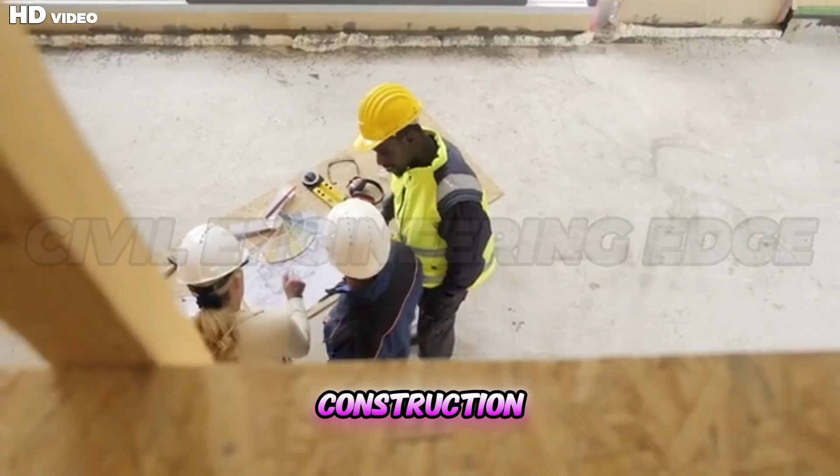Over time, AI learns from historical data, recognizing recurring issues, identifying weak components, and even suggesting better machine brands or models for future purchases. The result is a smarter, leaner, and more reliable fleet. Predictive maintenance represents a shift from reacting to problems toward preventing them entirely. It allows construction firms to maintain momentum, efficiency, and safety, the three pillars of modern project success.

In this AI-enhanced world, construction sites don't wait for breakdowns. Instead, they move seamlessly forward, guided by intelligent systems that keep every bolt, motor, and circuit performing at its best, ensuring that progress never pauses.

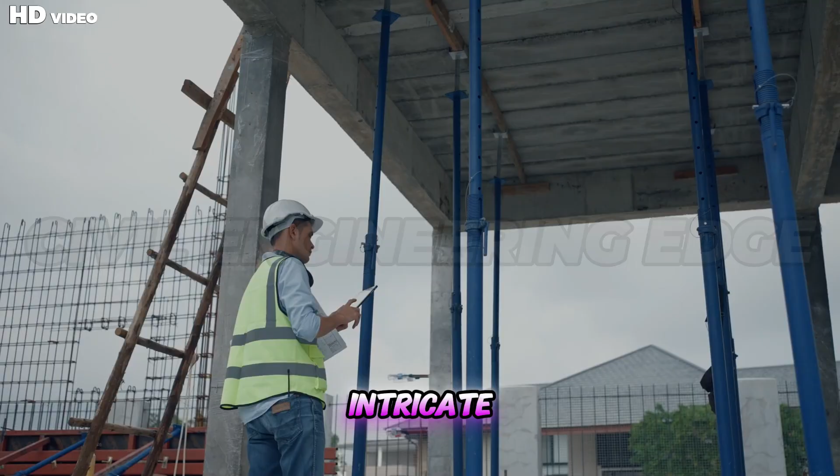Smart logistics, the brain of the construction supply chain. Behind every successful construction project lies an intricate ballet of materials: steel, cement, glass, and countless components arriving exactly when and where they're needed. But managing this logistics puzzle has always been a daunting challenge. AI is now stepping in as the brain of the construction supply chain, ensuring every piece arrives with precision and purpose.

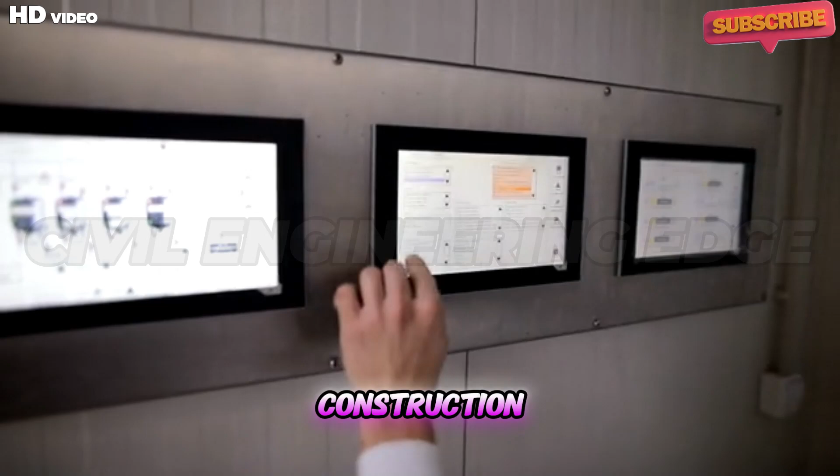Traditional supply chain management in construction often suffers from inefficiencies, late deliveries, overstocking, material shortages, or poor coordination between suppliers and sites. These issues lead to delays, cost overruns, and waste. AI solves these age-old problems by transforming logistics into a data-driven, intelligent network that predicts demand, optimizes transportation, and minimizes waste. AI logistics platforms such as Autodesk Construction Cloud and GEP Smart use real-time data and predictive analytics to synchronize every aspect of material movement.

For instance, if a site's concrete usage rate exceeds the projected rate, AI automatically signals suppliers to increase the next shipment, ensuring continuity without over-ordering. Conversely, if weather delays work, the AI postpones deliveries to avoid storage clutter or spoilage.

Machine learning algorithms track variables such as material costs, availability, transportation routes, and even geopolitical conditions. This enables predictive procurement, where AI foresees shortages or price spikes before they occur and suggests alternate suppliers or materials. In doing so, it ensures that construction projects remain resilient even during global supply chain disruptions.

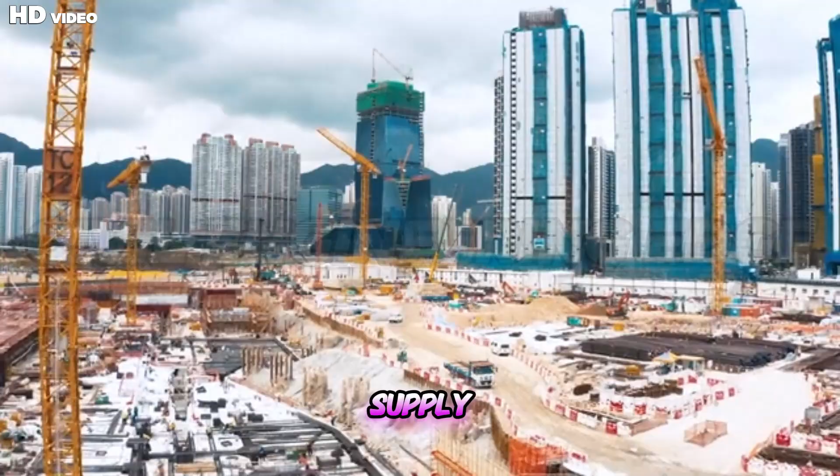The integration of AI with GPS tracking, RFID tags, and IoT sensors brings real-time visibility to every truck and shipment. Site managers can monitor deliveries minute by minute, receiving instant alerts for delays or route deviations. This transparency eliminates guesswork and fosters accountability across vendors and logistics teams.

Moreover, AI contributes to sustainability by optimizing transport routes to reduce fuel consumption and carbon emissions. By preventing over-ordering, it minimizes material waste, aligning modern construction practices with environmental goals. Perhaps most impressively, smart logistics systems connect seamlessly with AI-powered project management tools. The result is a unified ecosystem where design, scheduling, procurement, and delivery operate as one intelligent network.

AI has turned what was once the most chaotic element of construction, logistics, into a symphony of precision. Every truck, shipment, and crane movement is choreographed in harmony with the project timeline. In tomorrow's construction world, logistics will no longer be a background process. It will be the intelligent heartbeat driving efficiency, sustainability, and success across every layer of the built environment.

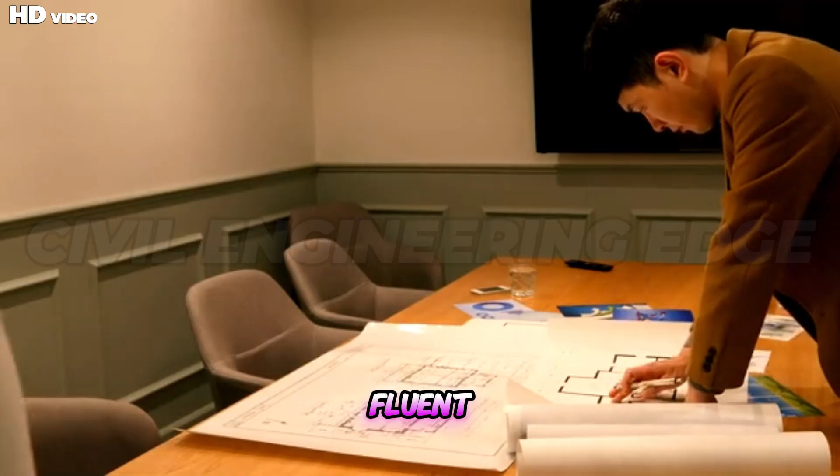The future is now: challenges and opportunities. Upskilling the workforce, the new age of construction talent. As artificial intelligence transforms the construction industry, one truth becomes increasingly clear: technology alone cannot build the future. It needs people, skilled, adaptive, and empowered people who can collaborate with machines rather than compete against them. This new era demands an upskilled workforce, one fluent not only in blueprints and concrete, but also in algorithms and data.

For decades, construction has been one of the most labor-intensive industries in the world. But now, automation, robotics, and AI systems are taking over repetitive and hazardous tasks. Machines dig trenches, robots lay bricks, and AI schedules entire projects. So, where do humans fit in? The answer lies in reskilling and redefinition.

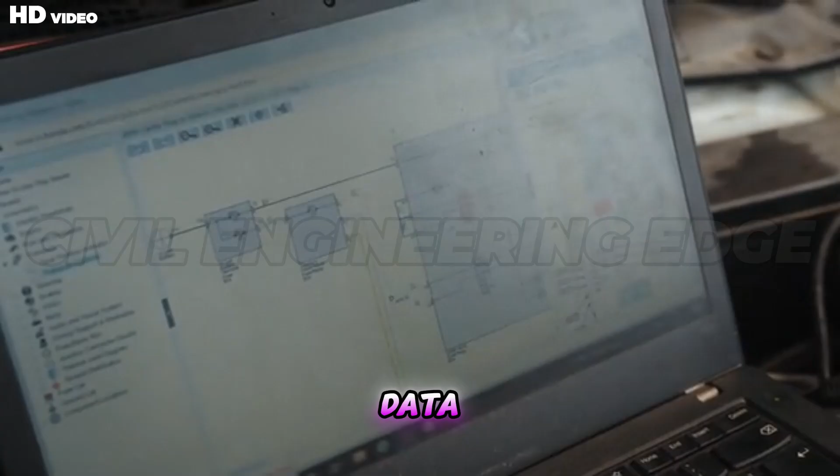The construction professional of tomorrow won't just be a site engineer or foreman. They'll be data interpreters, digital modelers, and automation supervisors. Engineers must understand how to work with AI systems, manage autonomous equipment, and analyze the data these technologies generate. In other words, the industry needs tech-savvy builders who can bridge the gap between traditional craftsmanship and digital intelligence.

Educational institutions and industry leaders are already responding to this challenge. Universities now integrate courses on AI in civil engineering, machine learning for design optimization, and data-driven project management. Training programs led by companies like Autodesk, Trimble, and Caterpillar are equipping engineers with skills in BIM AI integration, drone analytics, and predictive modeling. But upskilling isn't just about learning new software, it's about a mindset shift.

Workers must embrace continuous learning and adaptability. In this fast-evolving landscape, knowledge has a half-life. What you know today may be outdated tomorrow. The most valuable professionals will be those who can evolve as technology evolves.

This transformation also brings inclusivity. AI allows younger generations, women, and differently abled individuals to participate in roles that were once physically demanding. It democratizes opportunity, making construction more diverse and technology-driven. Governments and private organizations must work hand in hand to provide accessible training and certifications so no one is left behind in this AI revolution.

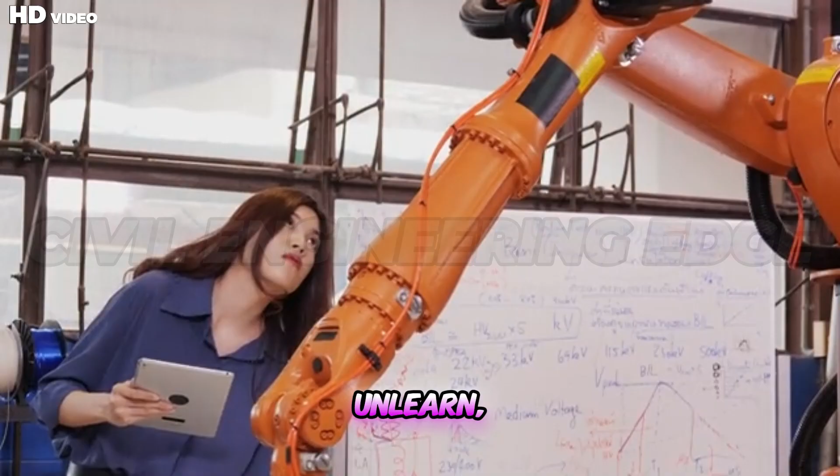The future construction workforce won't just build structures, they'll build systems that think, adapt, and sustain. AI is not here to replace the builder. It is here to redefine what it means to be one. The future belongs to those who learn, unlearn, and rebuild their skills for a world where humans and machines construct greatness together.

Ethical considerations, building with integrity in the age of AI. As AI reshapes construction into a data-driven, intelligent industry, we must pause to ask, what are the ethical costs of progress?

The promise of smarter cities and autonomous sites comes with new responsibilities to protect privacy, ensure fairness, and uphold humanity in a world increasingly run by machines. At the core of AI's power is data, massive amounts of it. Every drone image, design simulation, and sensor reading contributes to smarter decisions.

But with data comes the risk of privacy breaches and misuse. Construction sites equipped with surveillance drones and biometric monitoring raise questions about how data is stored, who controls it, and how securely it's protected. Ethical AI demands transparency and accountability, ensuring that information is used responsibly and with consent.

Another pressing concern is algorithmic bias. AI systems learn from data, but if that data contains human bias, the algorithms may reproduce or even amplify it. For example, AI used for worker performance analytics could unintentionally favor certain demographics or skill profiles. Ensuring fairness requires diverse datasets, unbiased training, and continuous auditing of AI models.

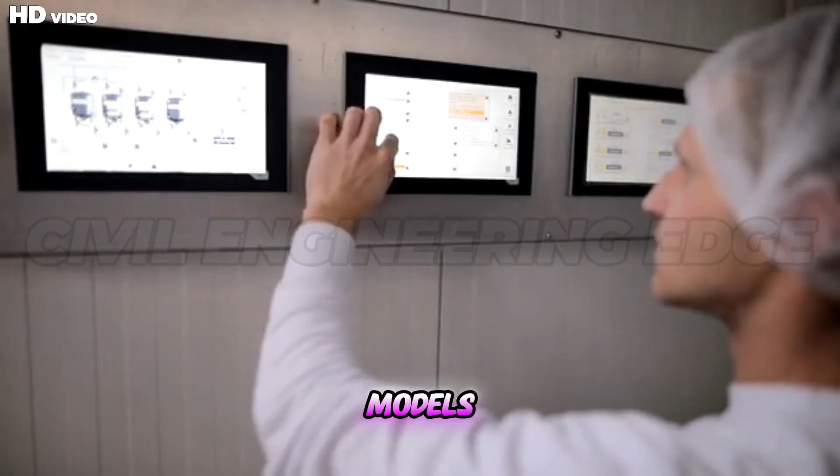And then there's the issue of job displacement. As robots replace manual labor, fears of unemployment grow. However, the narrative isn't just about loss, it's about transformation. While some traditional roles fade, new opportunities emerge in AI operation, digital design, and system maintenance. The ethical challenge lies in creating pathways for transition, retraining workers, supporting communities, and ensuring technology uplifts rather than replaces.

Governments, industries, and academic institutions must establish AI ethics frameworks, guidelines that ensure automation serves humanity, not the other way around. These frameworks should promote environmental sustainability, data transparency, and human welfare. In this AI-driven construction future, ethics becomes as important as engineering. Every algorithm, every machine decision must align with human values, safety, equality, and sustainability.

The goal isn't just to build cities that function efficiently, but to build societies that thrive responsibly. Ultimately, AI in construction must not only build smarter structures, it must also build a smarter conscience. Because progress without ethics is merely automation, not advancement.

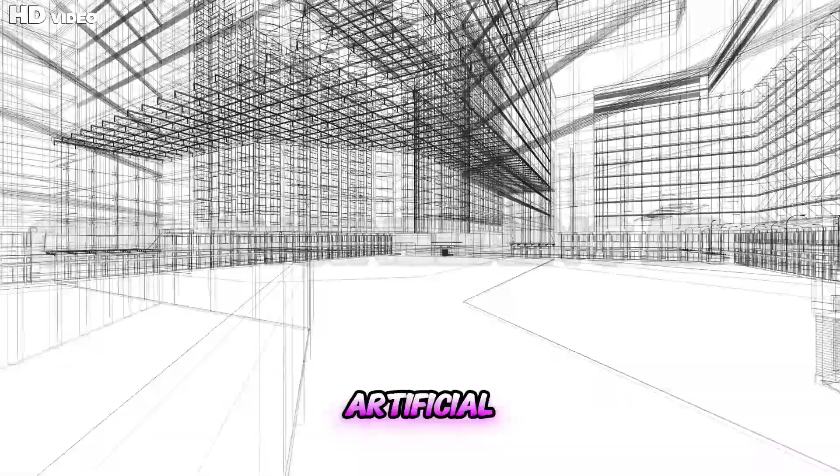Call to action: building a smarter, sustainable future with AI. As we stand at the crossroads of innovation and imagination, one question echoes across the skyline of progress. Are we ready to build the world of tomorrow with AI as our partner? Artificial intelligence has already begun rewriting the blueprint of construction, from design and planning to safety, logistics, and sustainability. It's creating an industry that is faster, safer, and greener than ever before.

Yet the true measure of this revolution isn't in machines or algorithms. It's in our vision, our choices, and our willingness to adapt. Imagine a city where every building self-regulates its energy use, where bridges monitor their structural health in real time, and where construction sites operate autonomously with zero accidents.

Imagine skyscrapers that adjust their form for wind loads, roads that repair themselves, and smart homes that communicate directly with infrastructure grids. This isn't the distant future. This is the world AI is already building. But to realize this potential, we must act.

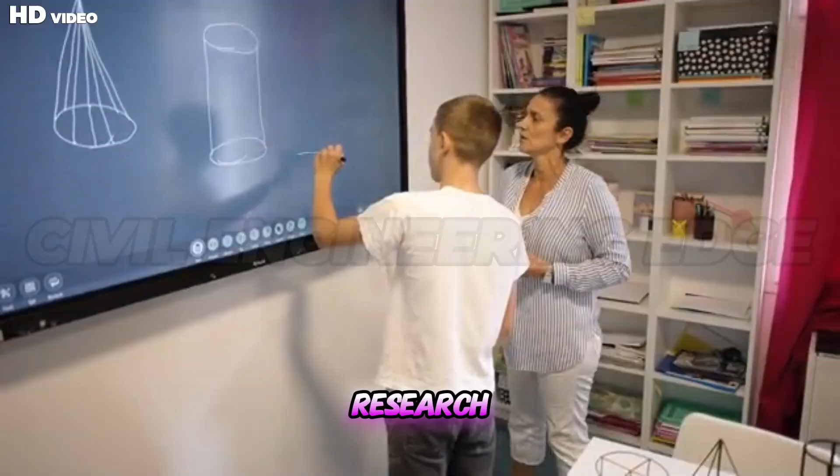Engineers, architects, policymakers, and educators must unite in shaping an ethical, inclusive, and sustainable AI-powered construction industry. We must invest in education and innovation, create AI ethics guidelines, and promote global collaboration to share research and resources. The construction of tomorrow must not only be intelligent, but also responsible, designed for people, by people, with AI as the enabler.

AI should be viewed not as a replacement for human creativity, but as an amplifier of it. It gives engineers the freedom to innovate beyond human limitation, to imagine forms and systems never before possible. Just as the Industrial Revolution mechanized labor, the AI revolution is intellectualizing construction, bringing imagination to life at digital speed.

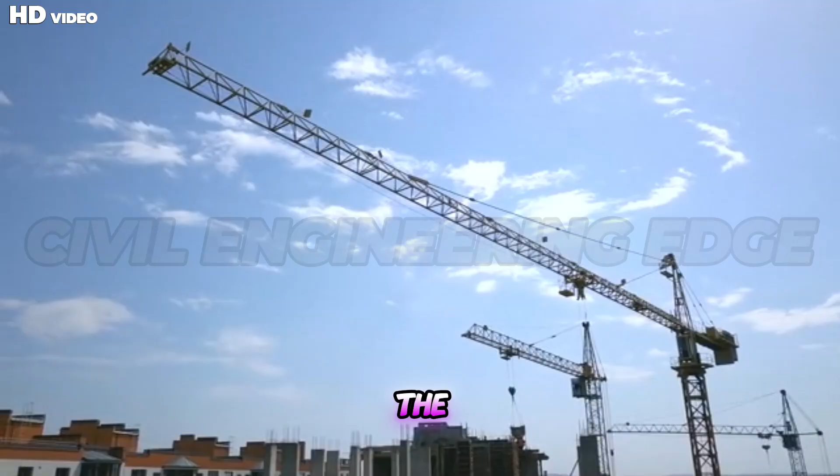So, as we gaze upon the horizon of smart cities, autonomous cranes, and living architecture, we must ask ourselves, will we shape AI or will AI shape us? The future is not waiting. It's being built right now by humans and machines working hand in hand. Together, they are constructing not just cities, but the foundation of a smarter, more sustainable civilization.

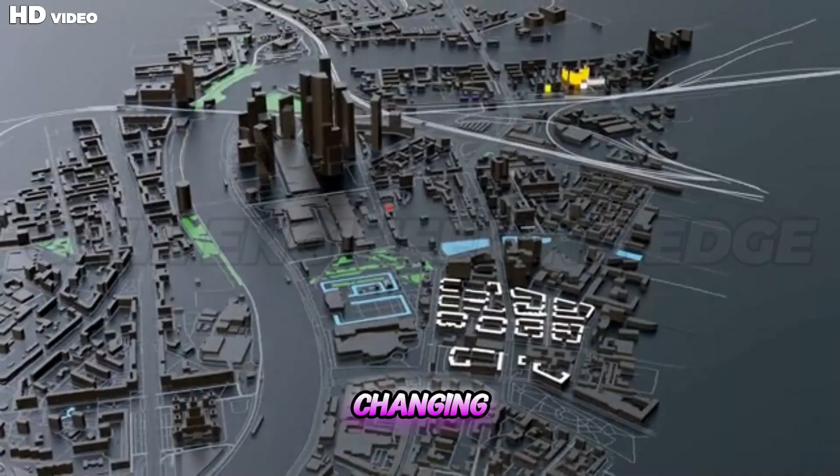This is the promise of artificial intelligence in construction, a partnership between human ingenuity and machine intelligence, building tomorrow's world today. The future of construction is no longer drawn on blueprints, it's written in code. Artificial intelligence is not just changing how we build, it's redefining the very foundations of progress. Smarter cities, greener infrastructure, and intelligent systems.

This is the world we're creating together. Yet, even in an age of machines, human vision remains the greatest force of all. With AI as our partner, we're engineering a new era of innovation and sustainability.